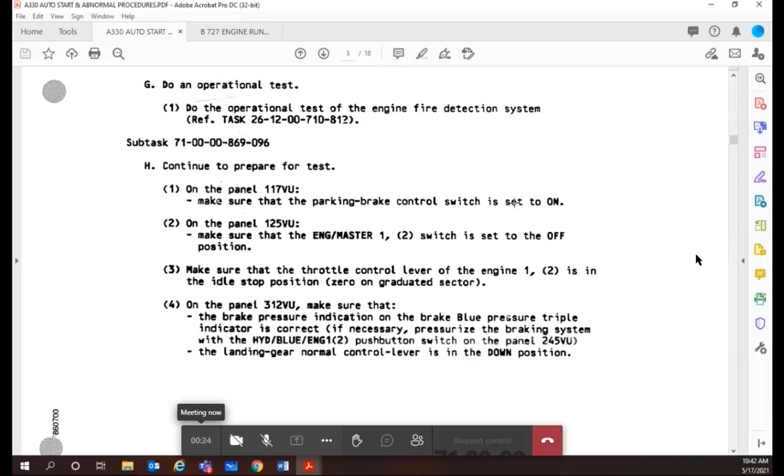We think brakes, we think hydraulics. So that's the kind of thing I may ask you, like if I say, what's the hydraulic pressure? I would hope you'd say, the pressure or quantity, and you'd want to check on the brakes. Keep that in mind.

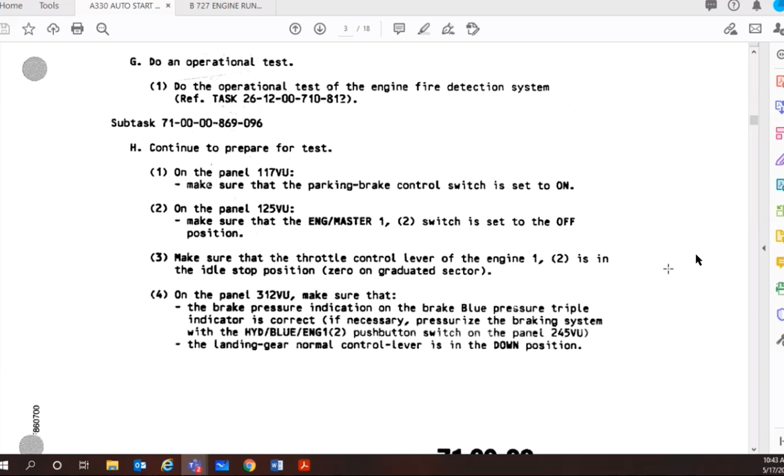Then you're doing your before start, so make sure the engine master switch on engine 1 and 2 - this is a twin engine airplane - is set to off. Make sure the throttle control lever of engine 1 and 2 is at the idle stop position, and check the brake pressure indication on the blue system.

Same thing we're doing - in your flow, you're going to make sure everything's prepared for the start. So our fuel levers in cut, the thrust levers at idle.

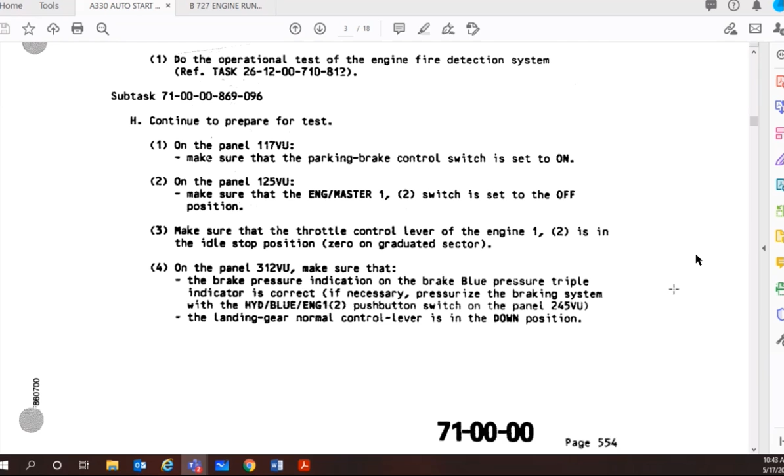Pretty straightforward, it's exactly the same, except you're just going to watch. Our interphone is actually us looking out the window, but generally you'll have someone on an interphone that you can communicate with on the ground - check the aircraft is cleared and that nobody remains in the dangerous areas.

What that's talking about is prior to our engine start, we will have permission from air traffic control for engine start. We will have permission from the ground man that everything is clear. Keep that in mind - we must talk to the ground before we crank the engine.

So you can see here on the ECAM, this is push the fuel key to get the fuel page. This is a screen where we can look at any system - they're just buttons, you push whatever system you want, and you'll see the exact schematic of the fuel system on the airplane with operating valves and pumps. So you'll be able to see it in real time when the valve opens or closes - when we put the fuel on, you'd see that.

Make sure there's a correct quantity of fuel in the fuel tanks to run the engine. Remember, you need quantity for the taxi, the run, hydraulic cooling, and weight and balance, depending on the airplane. So you'd want to make sure there's enough fuel, because some airplanes have a minimum taxi fuel in order to solve all of these issues.

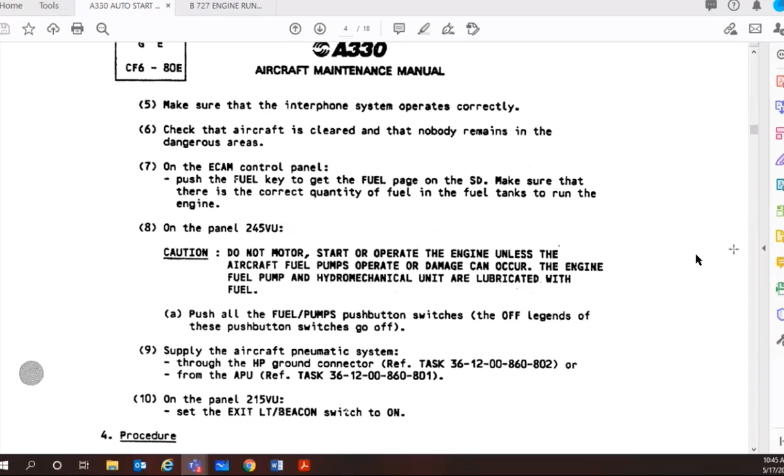We don't run our hydraulics long enough - right now our number 3 tank is empty. I don't run the hydraulics long enough to worry about getting temperatures, so that's why I don't have any fuel in there. But generally, when you're moving the airplane, if you're at minimum fuel, you're going to want to make sure the fuel is exactly where it's supposed to be.

You see here, cautions - notes and cautions are really important, and warnings. Do not motor, start, or operate the engine unless the aircraft fuel pumps operate, or damage can occur. The engine, fuel pump, and hydromechanical unit are lubricated with fuel. So again, with everything on the airplane, you want to make sure the fluids are there - not just fuel, hydraulics, etc. Everything.

Then it says push all the fuel pump push button switches - the off legends of these push button switches go off. These are called switch lights, in slang meaning the switch operates something and it indicates something.

It's pretty straightforward - if it's off, when you push the switch, the off legend just goes away. So when you look at these glass cockpits, the push button switches you'll see will be mostly dark. I mean, if you had everything up and running - the flight displays, the ECAMs, everything, and then the actual control panels for these systems - the control panels will look basically either dark, or they'll show off legend, or normal, or on.

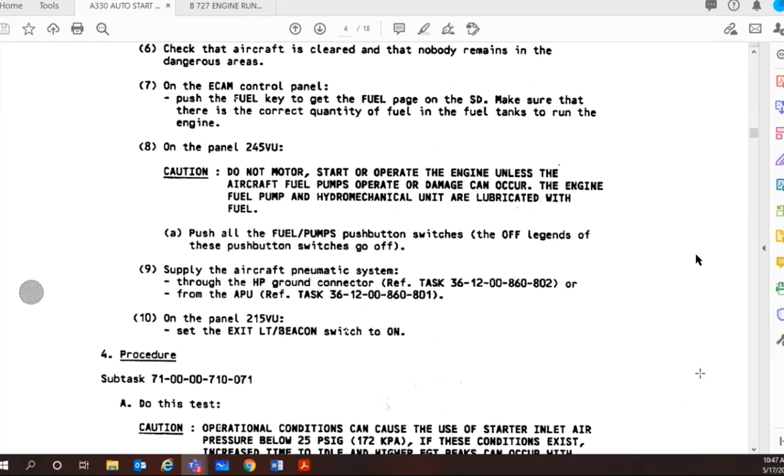Okay, so then you see supply the aircraft with pneumatic air. As soon as we're using the APU, you will bring on the bleeds, and you would do the same thing on this airplane as well.

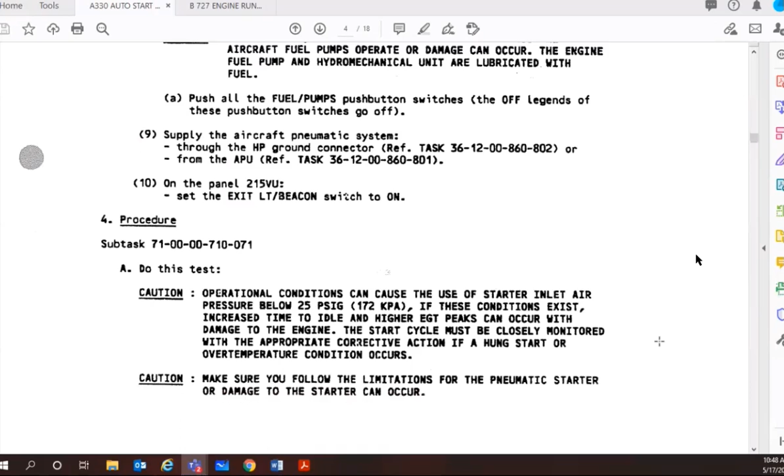So it says on the panel, set the exit light or beacon switch to on. Prior to engine start, just like our flow, when we're ready to crank engines, after we get permission from the ground controller, we'll say okay, turning one and ready to start engines. We'll put the beacon on, and we'll start our sequence.

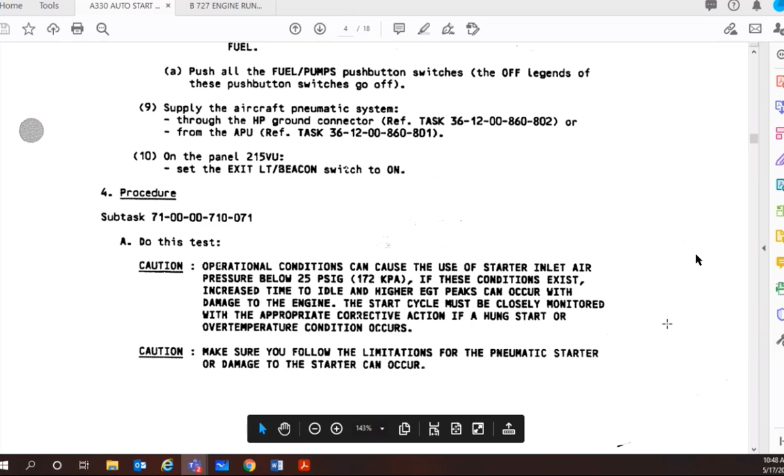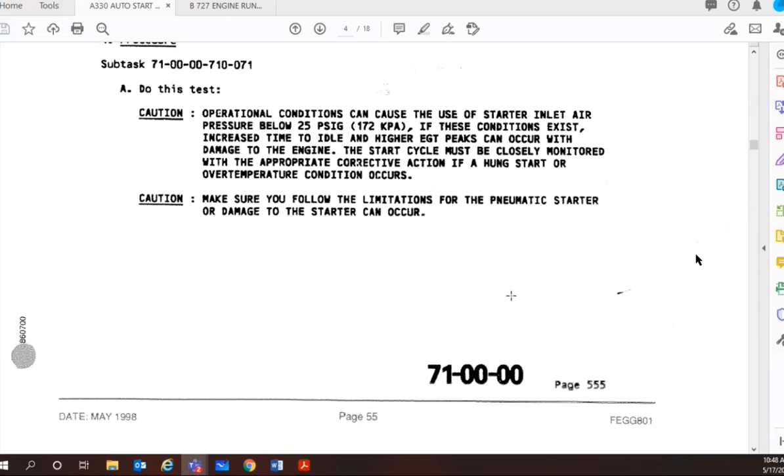And you see the cautions. Make sure you follow the limitations for the starter. That is something that this week you should have memorized for our starter duty cycles on our 727.

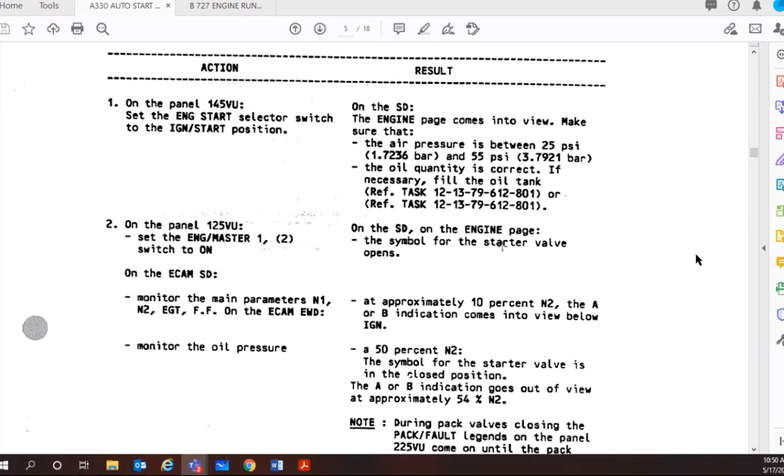On this panel, set the engine master switch to on. That's the fuel on, and you see this symbol for the starter valve opens. So right away, we would have the duct pressure visual to us up here. When we hit the master switch, the system display will show us the start valve open on our pneumatic system. Just like we see in our 727, only this thing you're not really touching much.

And then on the system display, you monitor the main parameters, N1, N2, EGT, fuel flow. On the ECAM, at approximately 10% N2, the A or B indication comes into view.

Remember I said some airplanes have an A and a B and a both selection for the igniter. Depending on where the airplane is departing from, A or B would be selected. This airplane can automatically do that. It knows that if its home base is Toronto, that it's going to use a certain igniter.

So again, this is where the air crew are testing the igniter's operation. If it doesn't work, then it'll go to B, and then it would annunciate, and you'd have to do something.

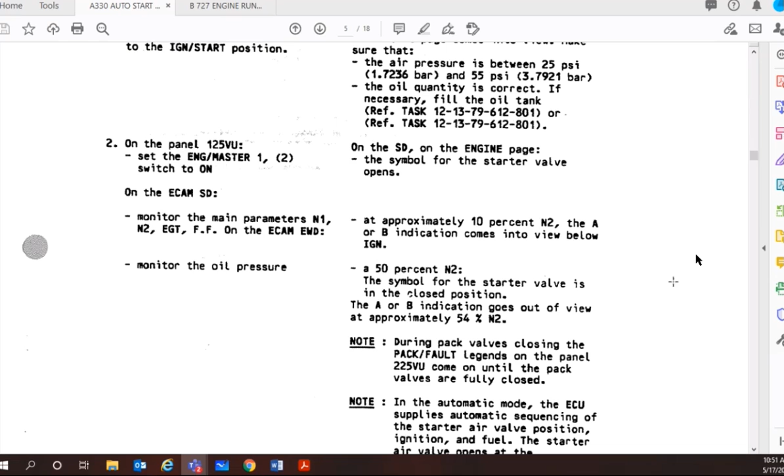Okay, so at 10% you get the ignition. Monitor the oil pressure. This is all you're doing, watching this. So again, here we are. We're cranking the engine. We get N2 right away. We got duct pressure. We got a start valve open light.

When we get oil pressure and positive N1, it doesn't matter, you still have to have it. At 50% N2, the start valve is closed, and A or B ignition goes out of view at approximately 54%. All of this is happening, and you're monitoring N1, N2, EGT, fuel flow.

When the computer sees N1 and its oil pressure is alive, it's going to add fuel. So then all of this will happen. You will see fuel flow happen. You will see EGT. Just like our engine start, we'll crank the engine.

We get duct pressure, start valve, N2 right away. Then watching for oil pressure will come up. We have N1. Then the fuel goes in. All this happens between 0 RPM and 50%.

Any questions so far?

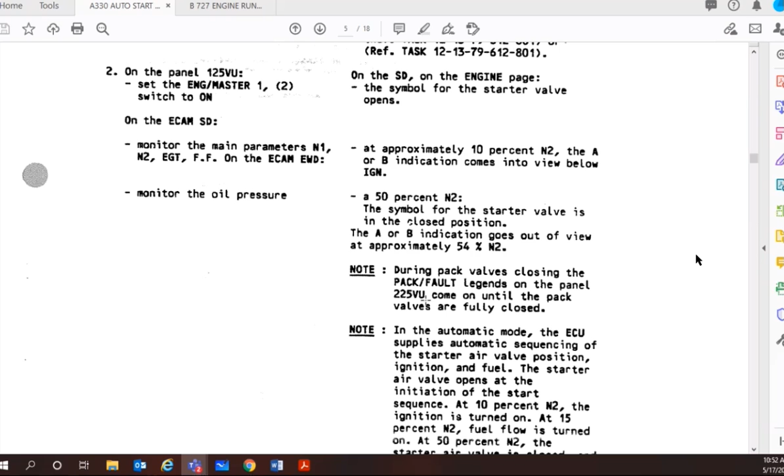Okay, so then you see the actual symbol for the start valve is closed, and the A and B indication goes out at 54%. During pack valve closing, the pack fault legends on the panel come on until the pack valves are fully closed. This is a disagreement indication as well.

To note, in the auto mode, the ECU supplies automatic sequencing of the starter, valve position, ignition, and fuel. The starter air valve opens at the initiation of the start sequence. At 10% N2, the ignition is turned on. At 15%, fuel flow is turned on. At 50% N2, the starter air is closed. And at 54%, the ignition is shut off.

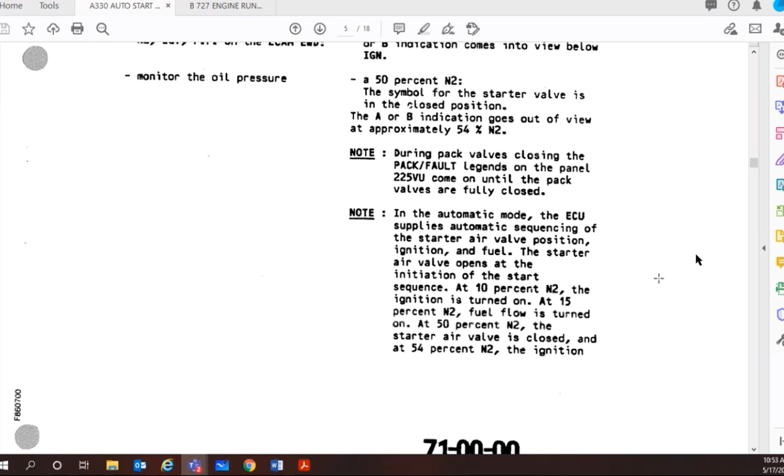So the same sequence that you monitor when you're doing a manual start. And this airplane, you can do a manual start, and it would be exactly like we do in the 727. Instead of just coming up here and just putting this on and away you go, you would be cranking and adding it at specific RPMs.

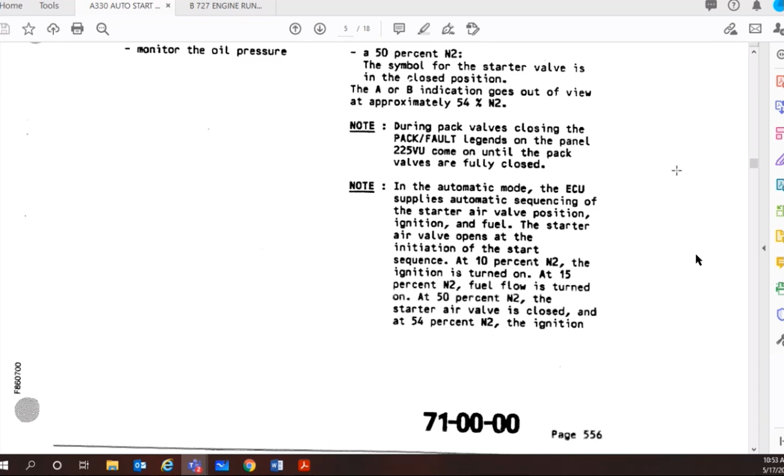Where are we? Ignition is turned off. The ECU will automatically interrupt the start for failure to light off, stall, or over temp. In addition, the ECU will annunciate low starter air pressure and low fan speed. Starter time limit and starter crash engagement protection is also supplied. Starter crash means that the engine is not stopped before it reattempts another start.

So in these auto starts, they will generally auto abort 3 times. If it senses any kind of issue, whatever it is, and it mentioned most of them here, doesn't light off, it stalls, it's rapidly approaching the start limit, low pressure, low speed, hung engine, that's what that means. It will stop the start, and it'll do that 3 times.

So once it stops the start the first time, it'll allow the engine to spool down, and before it stops, it'll re-engage the starter and crank it up again. And it'll do that 3 times before it says, okay, we don't want to start here for some reason.

Remember, it's still up to you to put the airplane into wind. It's still up to you to make sure that pressures are right, battery voltages are right, all of these things prior to attempting even an auto start.

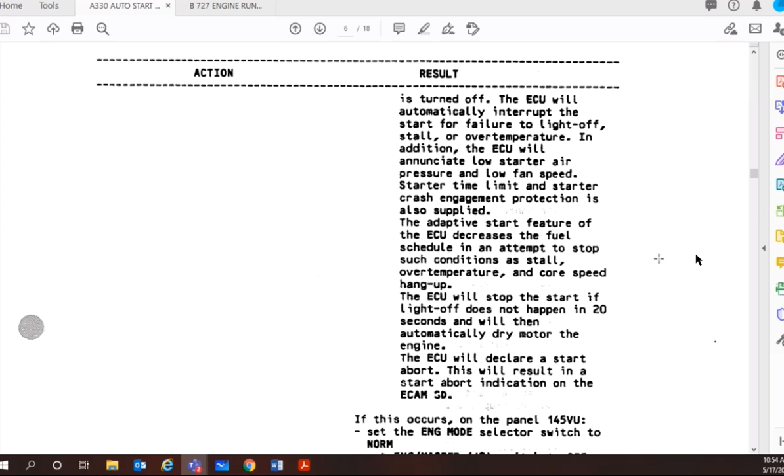The ECU will stop the start if the light off does not happen in 20 seconds. Look at that, even the airplane waits 20 seconds. Remember that, that is the magic number, 20 seconds. We can motor the engine for 2 minutes, we talked about that last week. So keep that in mind.

But generally, you will motor things for 20 seconds. You will clear the engine from fuel for 20 seconds. You will cool the engine at 20 seconds. You will wait for any parameter for 20 seconds before you make a decision. So then you can see here, it'll stop the start. If light off does not happen in 20 seconds, then it will then automatically dry motor the engine.

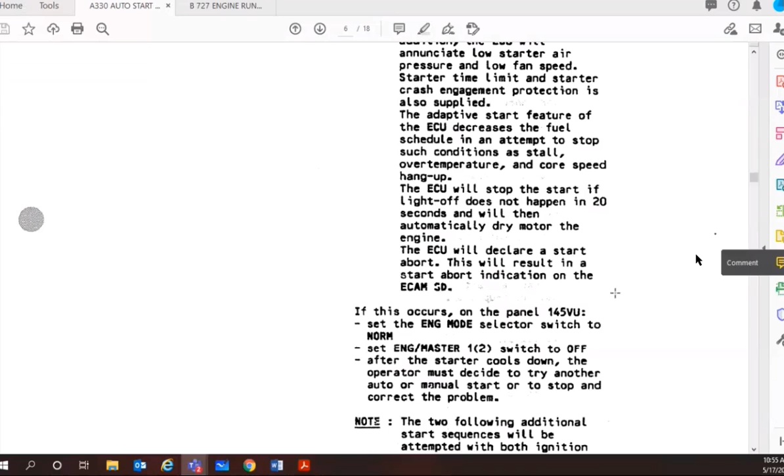The ECU will declare a start abort. This will result in a start abort indication on the ECAM system display. If it occurs, set the engine mode selector switch to normal, so you're basically shutting down the engine. Set the master switch to off. After the starter cools down, the operator must decide to try another auto start, or to stop and correct the problem.

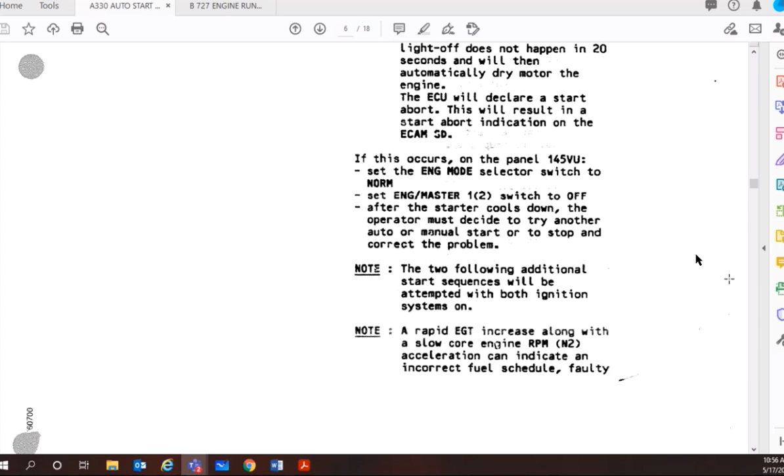Like I said, you're going to make a decision.

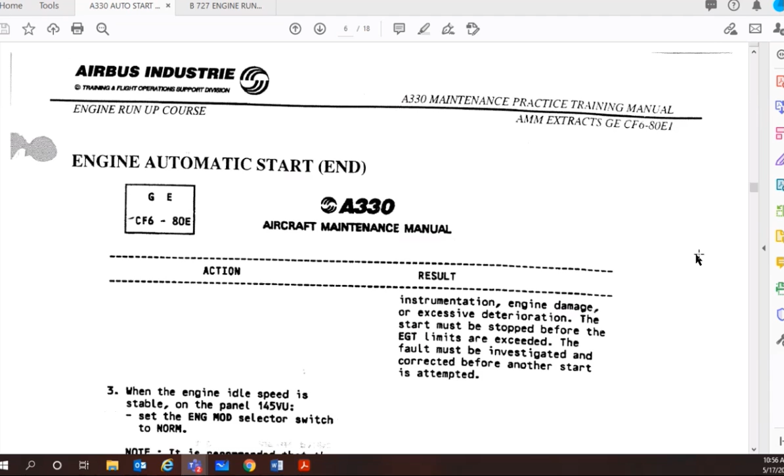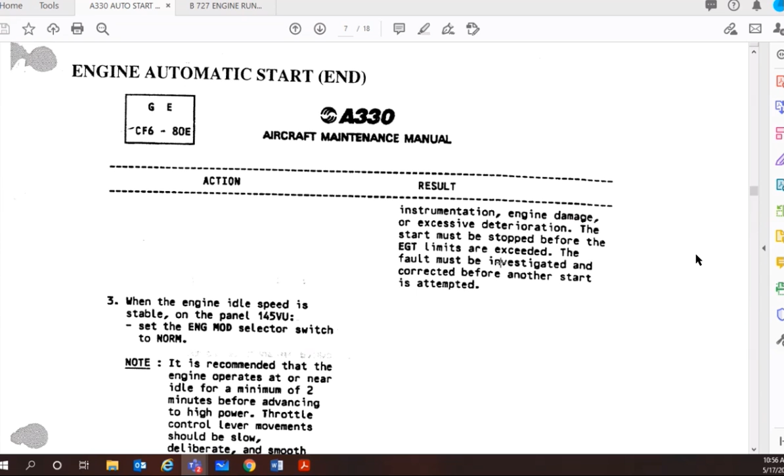And you can see down here it's giving you some tips. A rapid EGT increase along with a slow core engine RPM acceleration can indicate an incorrect fuel schedule, faulty instrumentation, engine damage, or excessive deterioration. The start must be stopped before the EGT limits are exceeded. The fault must be investigated and corrected before another start is attempted.

So it's telling you what could be the problem, and obviously that's why we look at things prior, so we can eliminate these issues like start issues, and that's why I talk about hung start after starter cutout. We want to differentiate where the problem is as soon as possible. So I'm not saying that people are going to say, oh, hung start is specifically what I described, because the engine can hang anywhere.

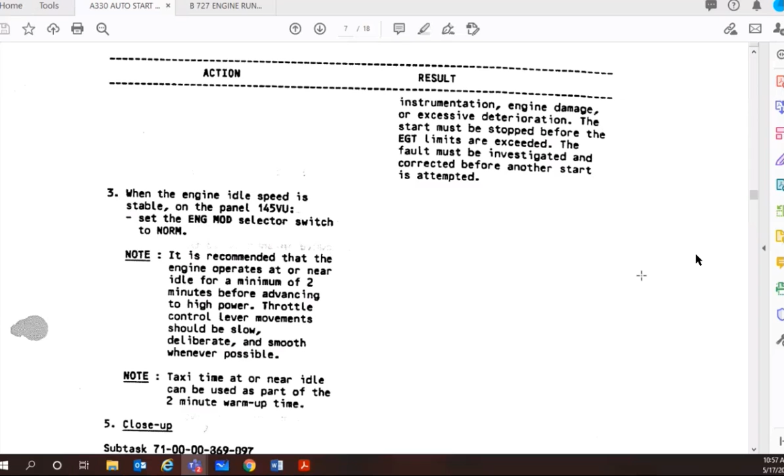But you want to know, was it before or after the starter was disengaged, so that you can have a direction to follow.

Okay, then you can see, when the engine idle speed is stable, set the engine mode selector switch to normal. And it recommends that we operate near idle for a minimum of 2 minutes. That's why we talked about on our 727 the green arcs in the indicator. Oil temperature should be in the green before you take the engine off of idle.

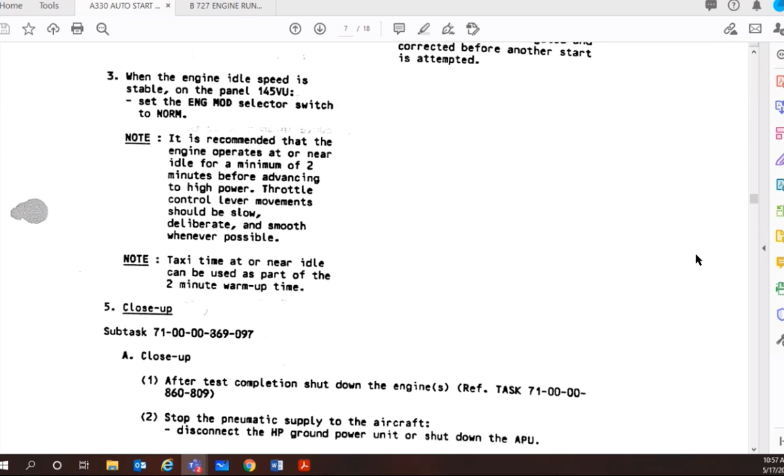But it also says here you can taxi a little bit as long as the engine is within, you don't take it too far off the idle. And it tells you how to start and stop the engine.

So right here is the EICAS that you can see. It's pretty straightforward. These are the primary indicators on the upper screen and the lower screen. So this is centralized between the two pilots on the front panel. And you can see that we have EPR, N1, and EGT. So that's what they fly with, and they usually have those up all the time.

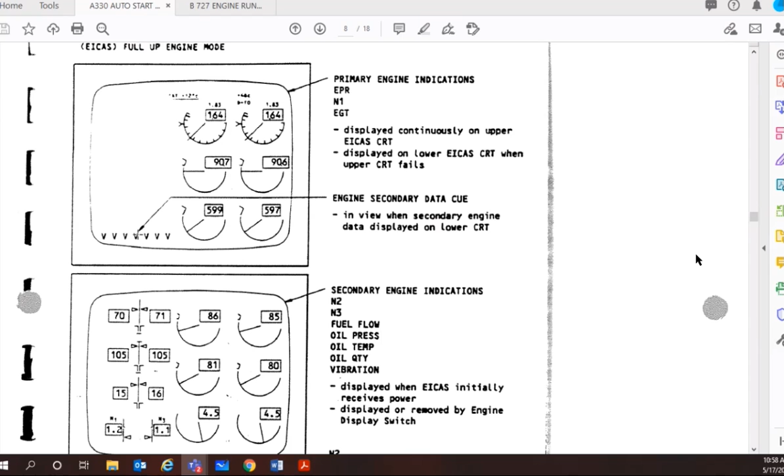And these cues over here are basically saying there's stuff below, secondary stuff below. So you can click on them and you can pull individuals up, or you can look at the next screen completely and put them all up there.

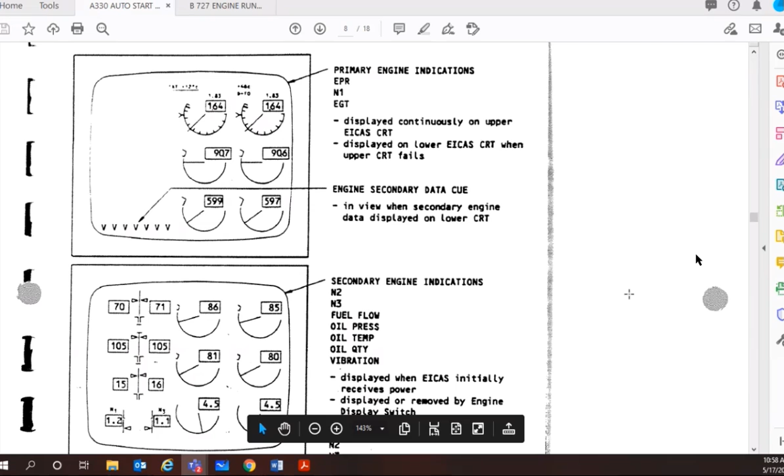Also, when you're flying or operating the engine, doing a taxi or running, if any one of these things causes an issue, it will pop up automatically. So if your oil pressure, oil temperature, quantity, etc., is an issue, it will display right away to draw your attention to it. There will also be an aural warning as well. It might be like a bing bong, that kind of thing. Beep, beep, some weird noise.

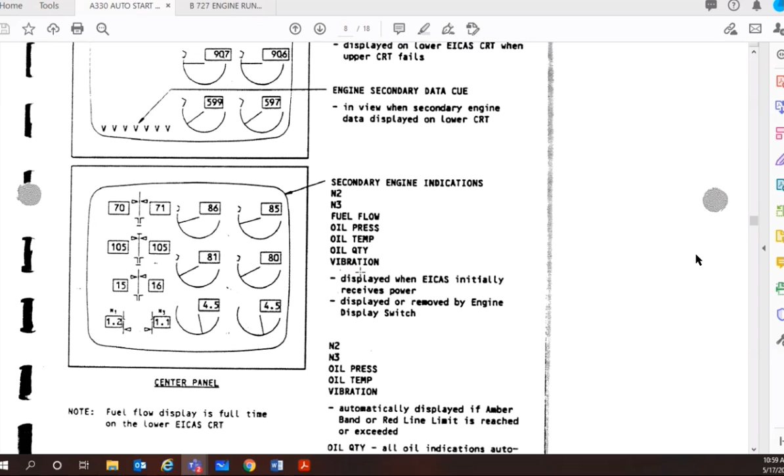And you can see these are the secondary instruments: fuel flow, oil pressure, temperature, quantity, vibration. And they're listed this way, like this, and then down here. Okay, good. I want to get down to, look at that. That's upside down, I don't want to worry about that.

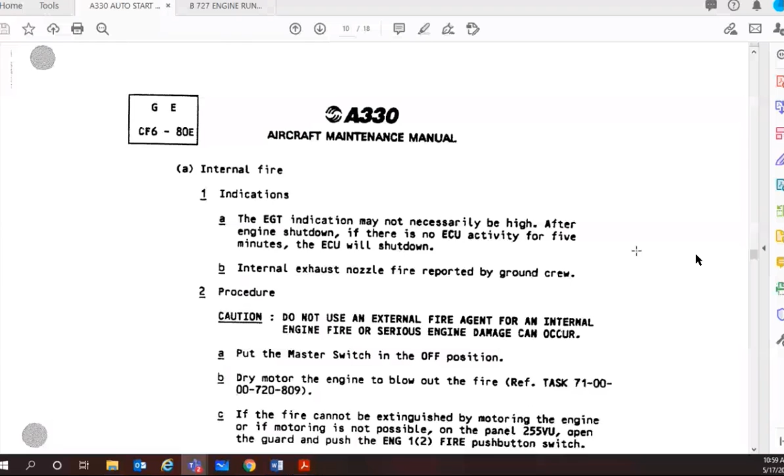So I want to review this internal engine fire. Indication may not necessarily be high EGT, unless the fire rolls into the tailpipe. I don't think you would see any indication on the engine instruments. This is generally the fire would be contained into the burner. But if the engine's windmilling or anything like that, it may blow the fire back into the tailpipe and you may see it there. But depends on where in this airplane, it has EGT, exhaust gas temperature. If it has turbine inlet or turbine outlet, you're not going to see it at all on the indicator.

So keep in mind, the internal engine fire is reported visually. Someone will see the smoke.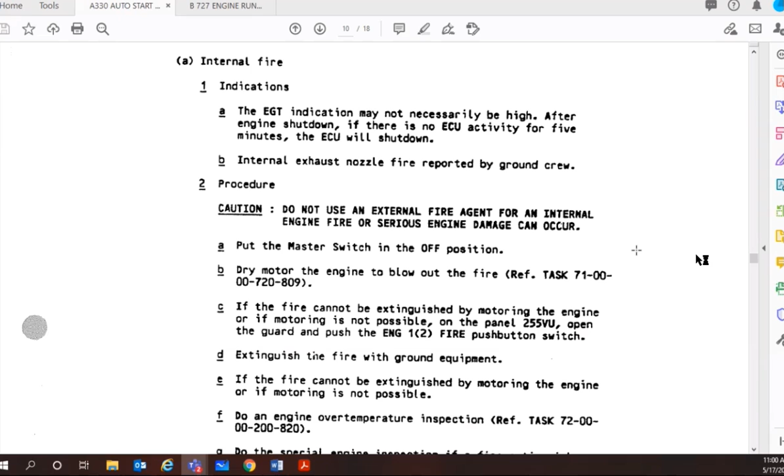Okay, then we talked about how we put it out. Well, this tells you technically how to do it on this airplane, but we will crank the engine, and our 727 is up to 2 minutes. But you can see here, put the master switch in the off position, dry motor the engine to blow out the fire. It's simple, you hit the start switch, and it'll crank. And if the master switch is in off, it won't do anything else.

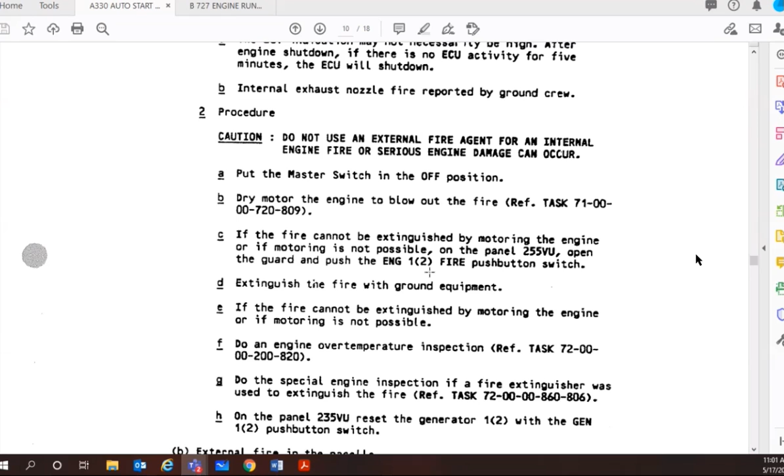And you can see if it cannot be extinguished by motoring the engine, or if motoring is not possible, push the fire button on this thing, but it's not going to do anything. You would extinguish the fire with ground equipment, okay? So pouring water through the engine, so if it's in the hangar for some reason and it happened, you could get a hose and just run the water through the core engine as you crank it inside the hangar, if possible. You may end up pushing the airplane out, that kind of stuff. But remember, you will not do igniter checks inside the building.

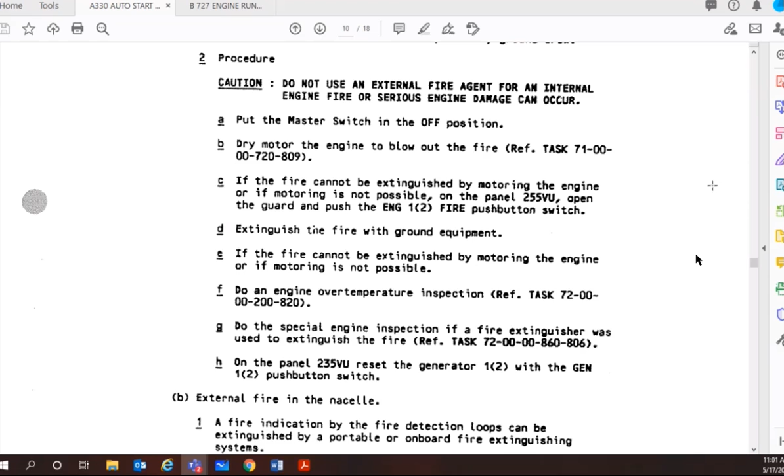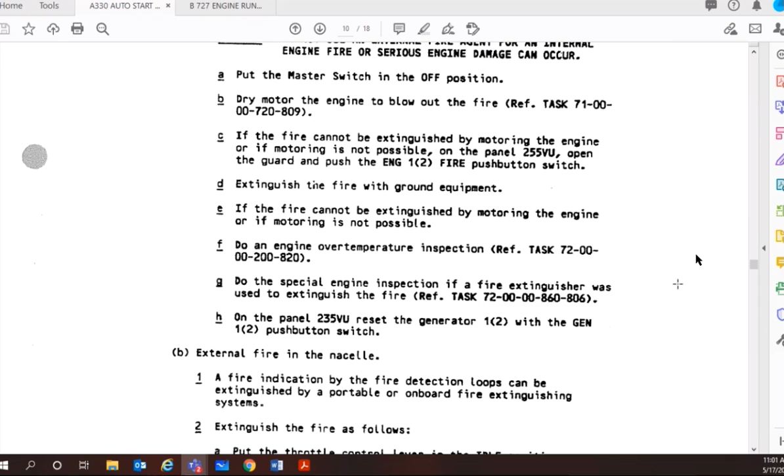Pretty well the only way this could happen to you in an abnormal situation. But we can crank it, we can start it, and if that still is an issue, then from a running condition, we can just pull the fire handle and the engine will spool down and flame out eventually. It may take about 10 minutes, but it will.

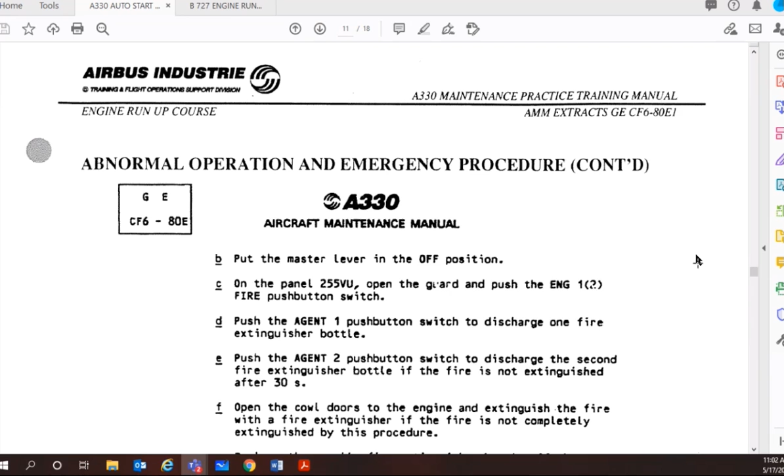And then we have the external fire. That's through fire detection. Straightforward, and you all know the fire drill by now and the 5 things that happen, I'm quite sure. And then it describes it to you here as well.

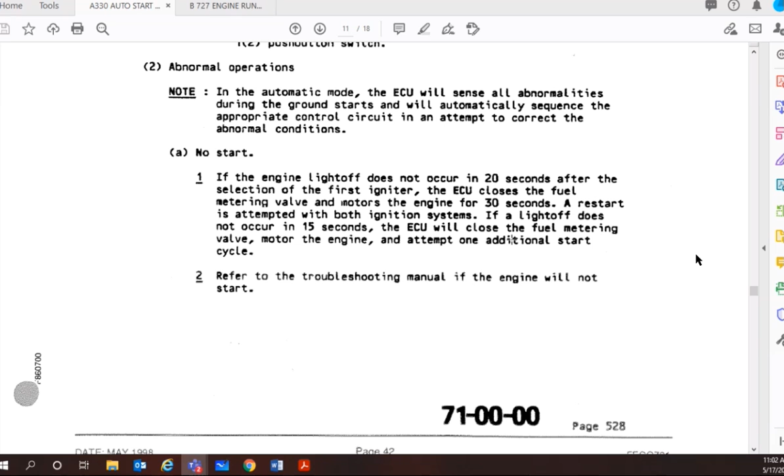And then we have a no start. Again, 20 seconds, no start means you don't know what's going on here. If light off does not occur in 20 seconds after the selection of first igniter, the ECU closes the fuel metering valve and motors engine for 30 seconds. We would do our stop start and we will motor for 20 seconds. The computer will automatically do all of this in an auto start.

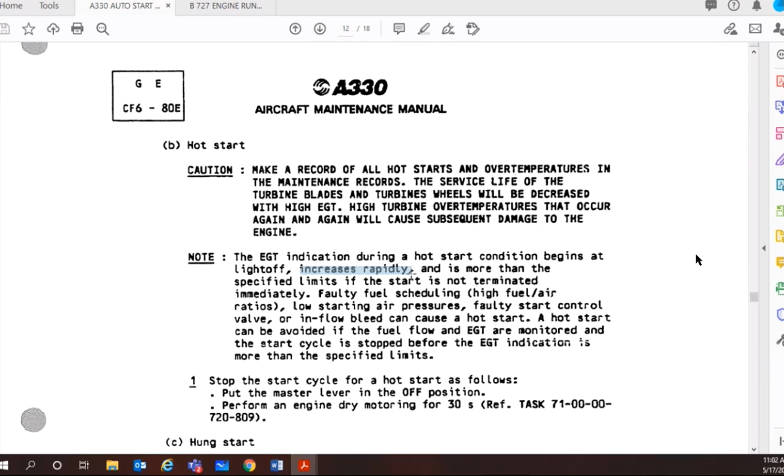Hot start: temperatures rapidly approaching the start limit. You can see it right here. Rapidly approaching the start limit. Hung start: no acceleration after starter cutout. Over temperature, we don't want to get there.

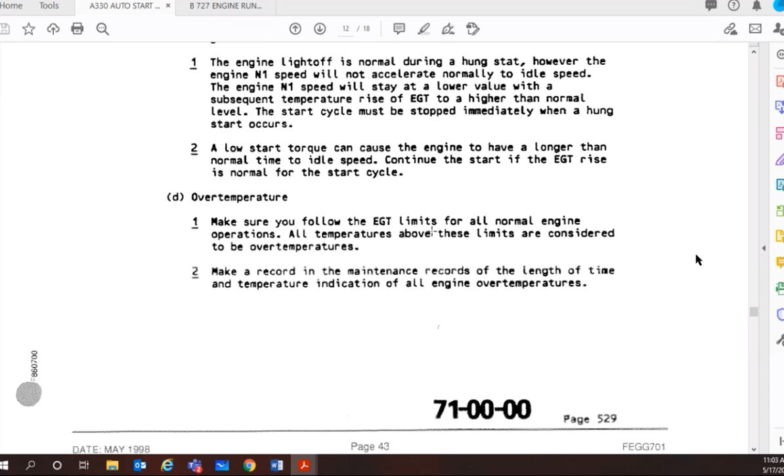Okay, you will move the thrust levers nice and gently, and we won't even talk about that because you're not going to get there. Low or no oil pressure, really simple: shut the engine down. Scavenge over temperature.

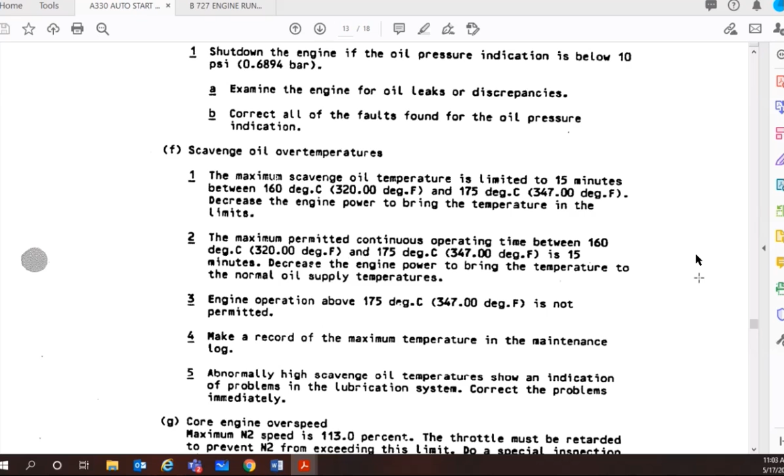This one you're allowed is between 160 and 175 degrees for 15 minutes. Our engine is above 120 in the yellow, and it can be 15 minutes as well, maximum. You're going to need to know that.

Don't forget, compressor stalls should not happen to us. And that has everything to do with wind speed, wind direction, and movement of the thrust lever. So if you're into wind and there's lots of wind, it will not compressor stall. But if there's a high wind speed and you're not into wind, more than likely you'll get a compressor stall no matter how fast you're moving that thrust lever.

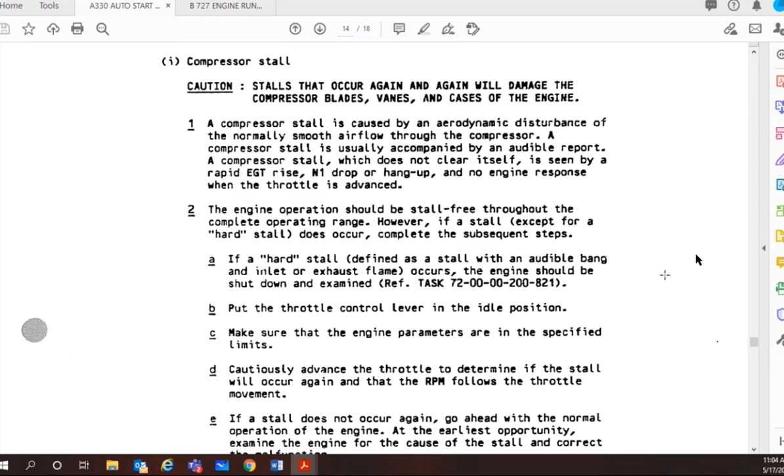Okay good, I'm done with that. Boom. Any questions?

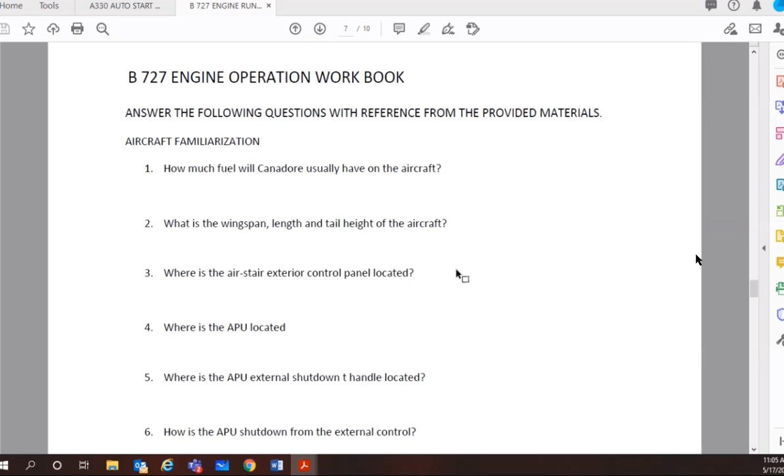Where is the air stair exterior control panel? Someone? Okay, I'll ask you, Mr. Hannes. You caught me as I just put some food in my mouth. That's beautiful, I have written down right here, it's forward and to the right of the air stair. I'm not very sure about this one. I think you're actually very, very accurate. It is just forward and to the right side of the air stair.

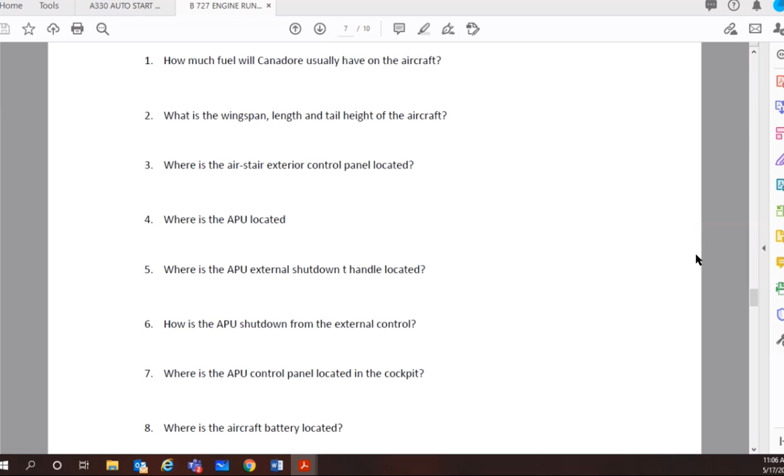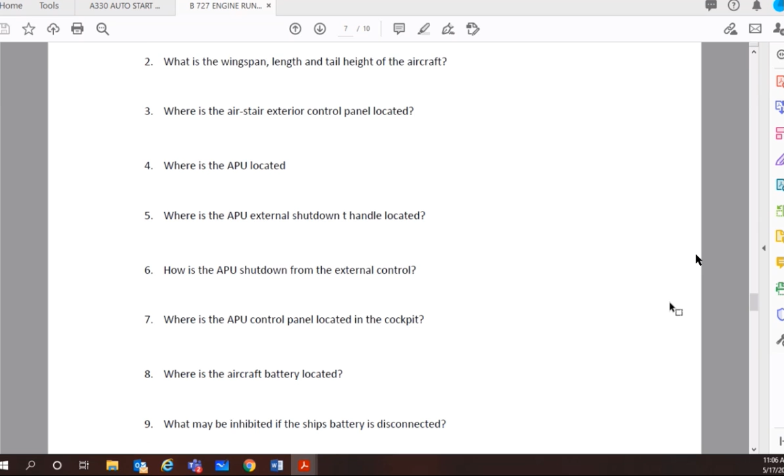Good, okay, where's the APU located? I'm going to go with Mr. Stopa. Is it not located in the belly? Is it in the belly? Or, well, it's under the main wheels. Well, yeah, it's in the wheel wells, right? Yeah, so the APU is located between the two main wheel wells, and it's accessed through the left side for servicing. Where is the APU external shutdown T-handle located?

Mr. Nicholson, hello, Mr. Nicholson? What the hell is that? Mr. Nicholson, are you there? If I don't get an answer, Mr. Nicholson, I'm going to have to get you on attendance. I think your mic's screwed, or you're just, I don't know.

Mr. Jerox, are you there? Yeah, I'm here. God bless you, but sir. Your mic working fine? Yeah, but I haven't got a fucking clue what the answer is. Give it a shot, I think it's in the... hold on, give it a shot, Eric. Where do you think? You know where the APU is, right? Yeah. So where do you think? I said the left side is where we service it. So where do you think it is?

So would it be on the left side of the APU or in that compartment? Like up in the wheel well, just left of it? So if we go to the left wheel well and then turn and look forward, just outside the wheel well, on the rear spar is the APU shutdown T-handle with the fire bottle and the APU panel. It's all there. All right, beautiful.

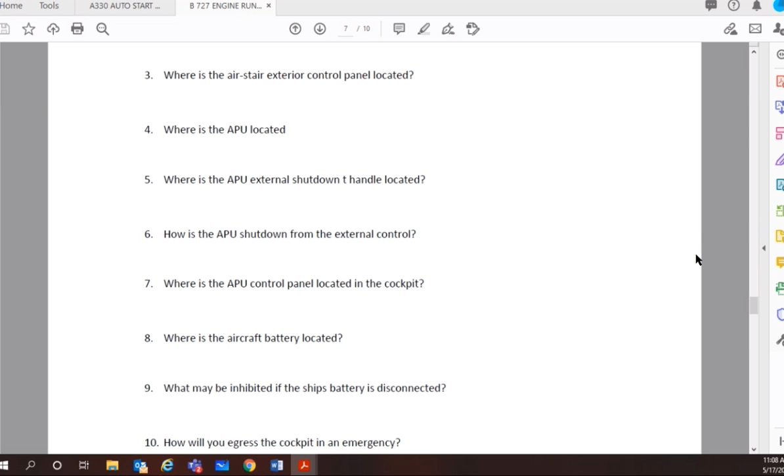Who can I get here? Mr. Cove, are you there, Mr. Cove? Yeah, I'm here. Beautiful, how do I shut down the APU from outside? Pull the red T-handle. Yeah, that's pretty well it. Pull that T-handle, and then you would fire the bottle. Now remember, the APU has its own auto fire setting, so auto shutdown.

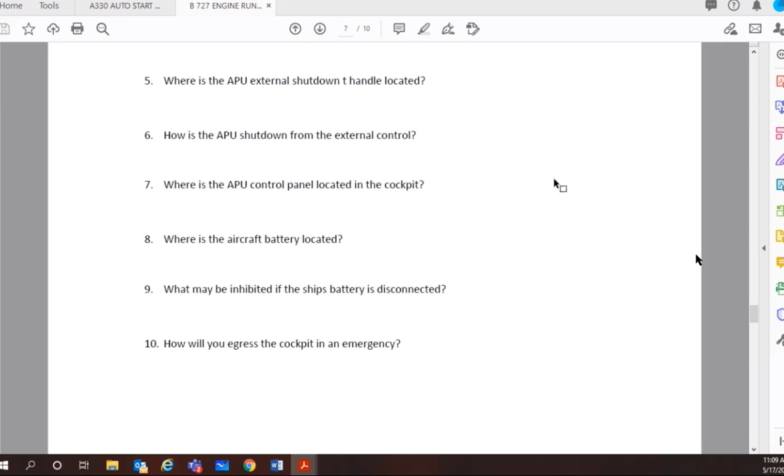It's that black guarded switch on the APU panel in the cockpit. If that's armed and there's power on the airplane, the APU will automatically do this. So even if the APU... say again? Okay, so if the APU auto fired, automatically fought the fire, you would still pull that T-handle and you would still fire the bottle to make sure that it did do what it's supposed to do.

Okay, number 7, who do I have here? Mr. Hartley. Where's the APU control panel located in the cockpit? To the right of the door as you're walking in. I think you're right, beautiful. It's to the right, just to probably around your hip height. That's where the APU panel is, on the back CB panel right side.

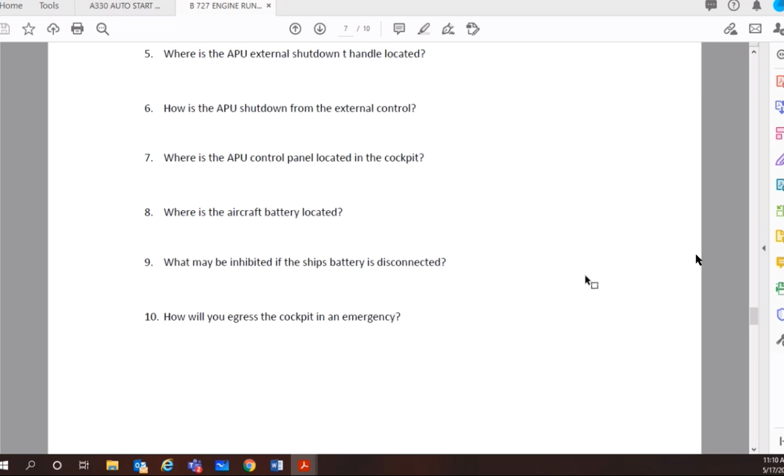Okay, Mr. Matiti, where's the battery located? Beecham. He's probably eating too, eh? You see how I'm finding all kinds of people just kind of tuning me in, but okay. Mr. Amaral, are you there?

Ian? Hey, Doug, is your mic working now? Dar, is my mic working? Yes, it is, Doug. Okay, sorry about earlier, I don't know what's going on with my computer.

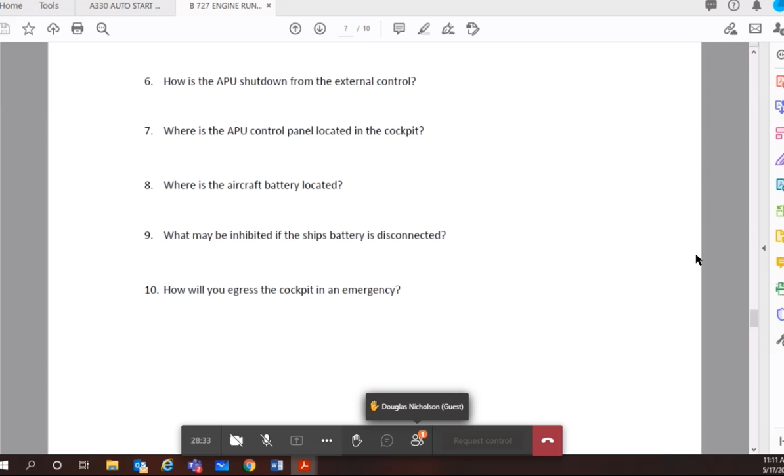That's all right, bud. But the battery, I believe, is located in the belly of the aircraft. Ah, thanks, Doug, you're right. It is in the belly, just after the nose gear in the E&E bay there. Thank you very much, Douglas.

Okay, what may be inhibited if the ship's battery is disconnected? Mr. Watson. Ground power unit? No, oh wait a minute. What was the question? Number 9, what may be inhibited if the ship's battery is disconnected? In other words, what won't work? I'm not sure, can anybody take a stab at that? Fire extinguishers. Exactly, the fire suppression system may be inhibited. Not every airplane, but there's a good chance.

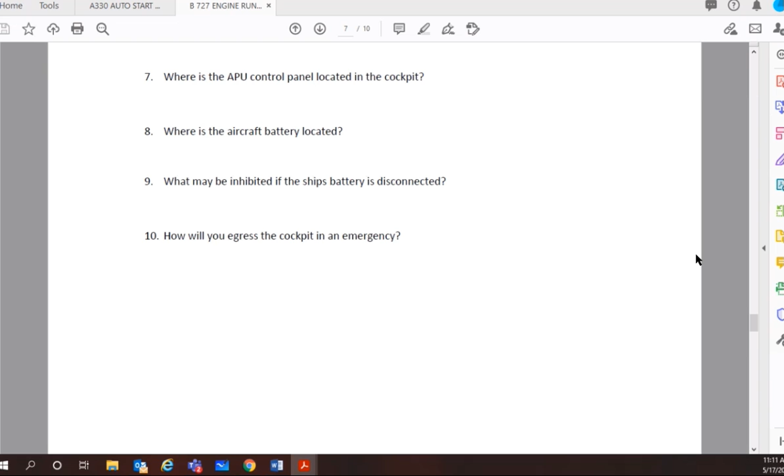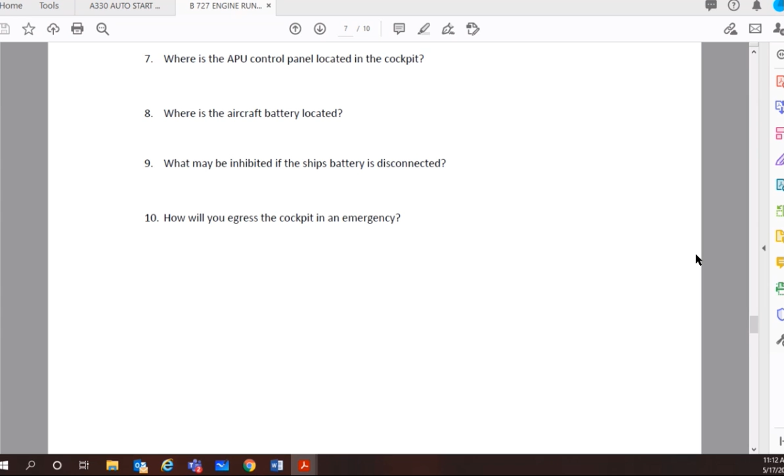Okay, number 10, Benoit Lalasse. How will you egress the cockpit in an emergency? I'm assuming with the rope out of the window. Yeah, that's an option, that's for sure. So we have two options, we can go out the front entry door or the windows if we have to. So keep that in mind. Beautiful, okay.

Mr. Zarvis, are you there?

Mr. Zarvis? Hello, Mr. Zarvis? Are you there now?

Luke, what does the acronym ATIS stand for? Wasn't it the aerodrome... Come on, Luke, you just got to know this. Can anybody jump in and help? I forgot, Automatic Terminal Information Service.

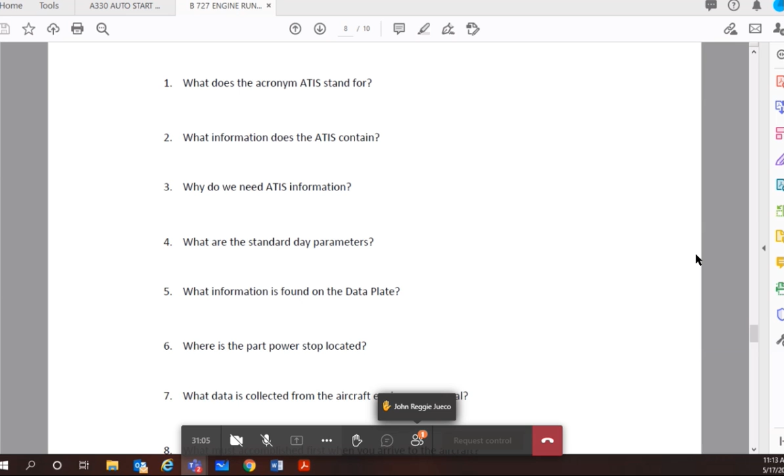Thank you, sir. So what information can I get on that? Who was that just answered? Was it Mr. Giroux again? Jewett? Evan Jewett, what's some of the information, Evan?

Temperature, dew point, barometric pressure, wind direction and speed, weather, runway use, and NOTAMs. Perfect, excellent. And why do we need it?

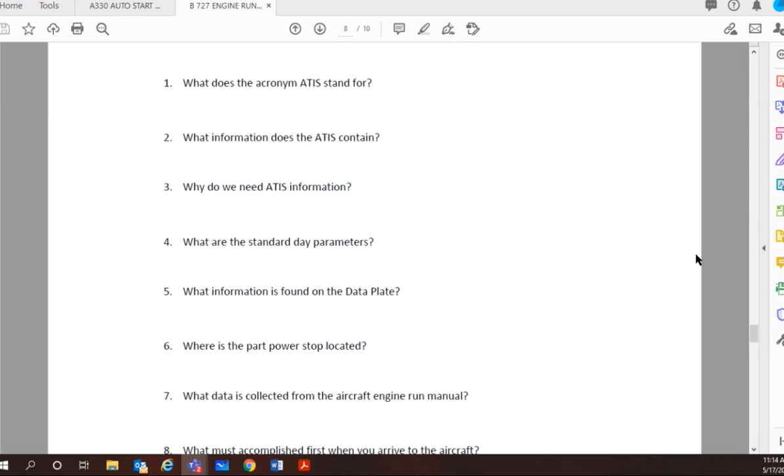To get our data for the power assurance check, and to even decide whether or not it's a good idea to do a power assurance check. Perfect, very well, that's exactly correct. Thank you very much. Excellent.

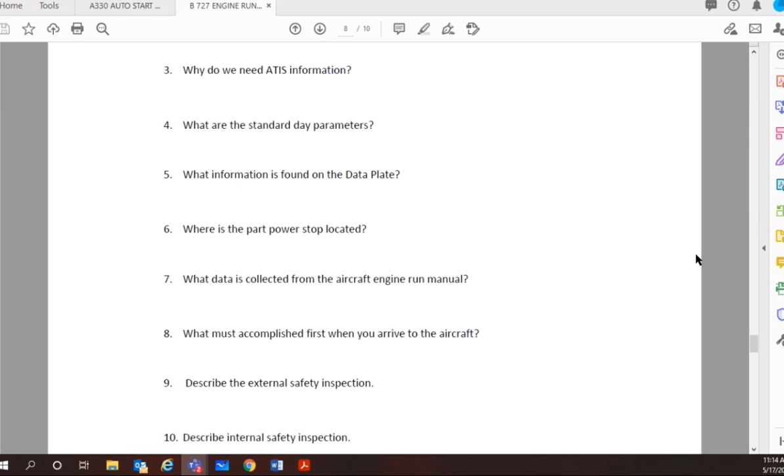Here's one, Mr. Olendi. Let's see if you can get this. Are you there, Matt? Yeah, I'm here, Dar. Can you tell me what's the standard day parameter? 15, is it 15 degrees? Yeah, no wind. And what's the altimeter setting?

Barometric pressure, 2992. Yeah, that's right, yes excellent. 2992, 15 degrees C, dry air, no wind, sea level pressure. Perfect, that's good. So 2992, 15 degrees.

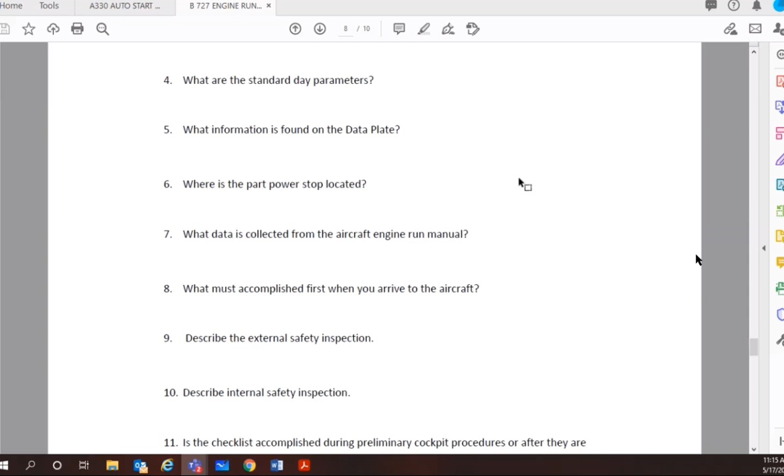The data plate on the JT8 when we do our power assurance test, Eric, can you tell me what's on that data plate? Maverick, you there? Sorry, it cut out. It has EPR, right? But I don't know what else, honestly. Yeah, good, yeah it does.

It has the EPR for part power, which is 1.65 on our JT8. It also has the engine serial number and our part power N2 RPM. So those are the most important things you're going to have - the engine serial number and the part power N2 RPM. Beautiful.

Okay, what data is collected from the engine run manual? I'll tell you that, we're going to get an N2 correction. We skipped one - yeah, I was just about to say. Oh, where's the part power stop? Okay, who wants to answer that? FCU, that's on the FCU. Beautiful, it's on the FCU.

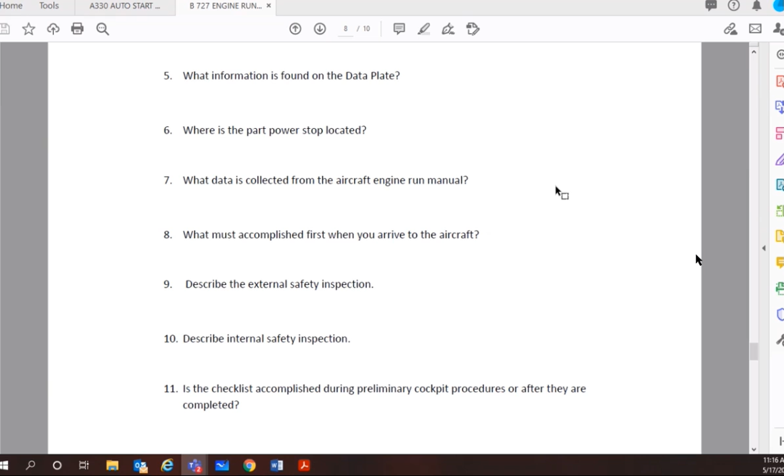Yes it is. Okay, so the data collected from the aircraft engine manual will be our N2 correction, our part power EPR for that day, and our takeoff EPR will come out of the manual. So takeoff EPR, part power EPR, and our N2 correction - those are the things we need.

Okay, here we go. Number 8. Where are we here? Mr. Mullen, are you there? Yes. Good, thank you for being there, Mr. Mullen.

What do we do when you arrive at the aircraft? What are you going to do? The external safety? Yes, I think that's correct. When you arrive at the airplane, you're going to do the external safety inspection. The answer's right below, God bless you. So who can I get down here?

Wyatt Hill, can you describe the external safety inspection to me? Yeah, they start at the nose gear for things like chocks and blocks and stuff like that. Gear doors. I just wanted to check the configuration of the aircraft too. Yeah, good. Then you go to your main gear, and same kind of thing.

Yeah, what else? What's additional at the main gear? Brakes and hydraulics. Yeah, that's right. And there's one more thing on our 727. APU inlet. Yeah, APU, very good. That's pretty good, Wyatt.